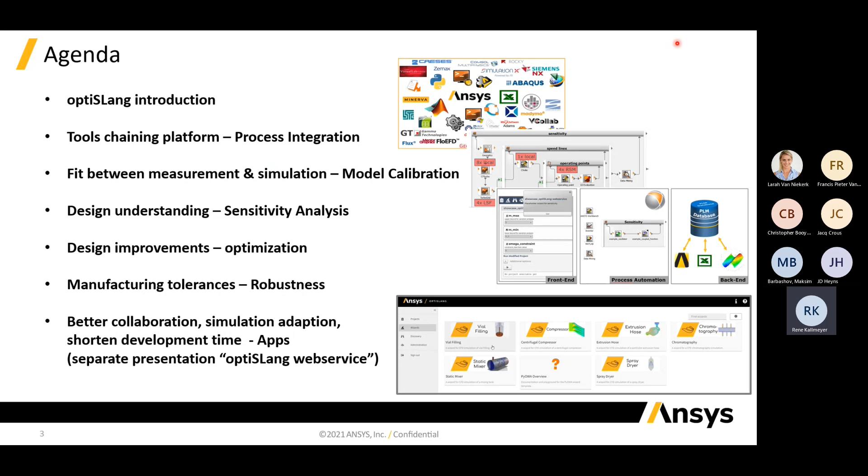Okay, so it's not a specific topic, so I can go on in this way. The first chapter will now be OptiSLang introduction, where we want to show - maybe you know on the Ansys side there's some platform unit, and in this platform unit there is Ansys OptiSLang, the tool for simulation automation and optimization, and also Ansys Granta, the material database, and also Ansys Minerva, the SPDM solution from Ansys.

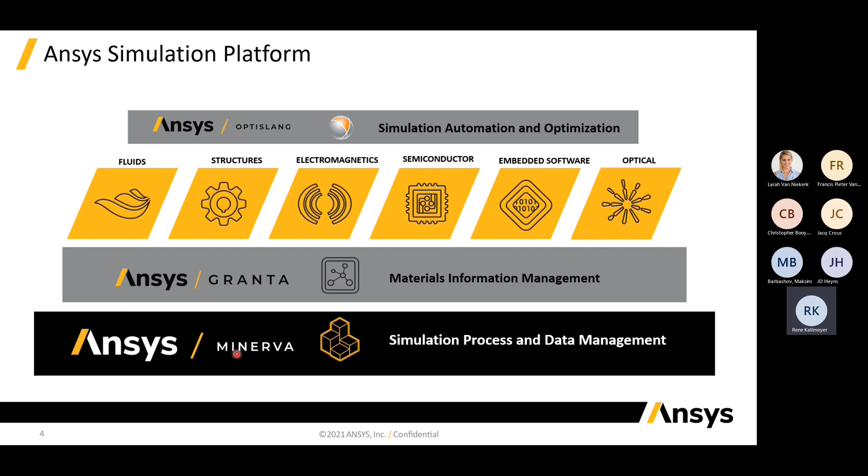And what is now OptiSLang? Here it should be shown how OptiSLang can help in this product development process. It means at each start you have some initial design or initial idea where you want to start, and you have some given design space, and you have some goals you want to minimize and also requirements which you must fulfill.

With OptiSLang, we want to show the optimization potential across the whole design space. We want to identify the ranking of important input parameters. We want to check robustness and reliability, and then be able to simply publish and reuse these created simulations and results.

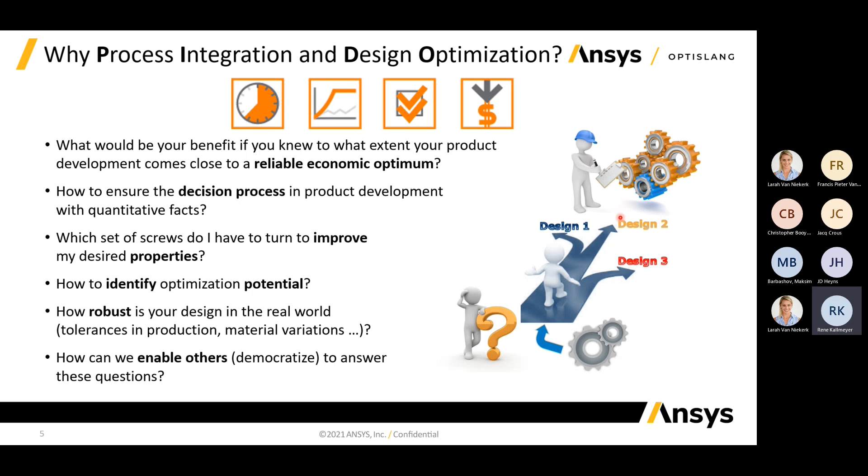And therefore, here you can see our capabilities we can offer for you. That means OptiSLang is a so-called PIDO tool, for process integration and design optimization. On the left-hand side, you can see which capabilities we offer for process integration.

The first one is we are vendor neutral. That means we are a platform where we can connect to Ansys tools, but also non-Ansys tools, or your own written tools. So we can create any tool chain you want and then let it run automatically overnight, over the weekend, over weeks, whatever.

And then also enable your colleagues, maybe your concept engineers or CAD designers, to reuse your previously created simulations. We want to drive this topic of simulation democratization. We want to enable, with our apps, that non-simulation experts can also use these created workflows. And going hand in hand with this, by using some of these analyses, we want to create digital twins from simulations, but also from external data like measurements or production data.

On the design optimization part, we start with sensitivity analysis. This means we want to see and check the ranking of most important, less important, and nearly unimportant parameters. We want to see what optimization potential we have, and gain system understanding of your assembly. Then we continue with optimization strategies, maybe Pareto optimization, cost function plus function optimization, or cost optimization and function optimization.

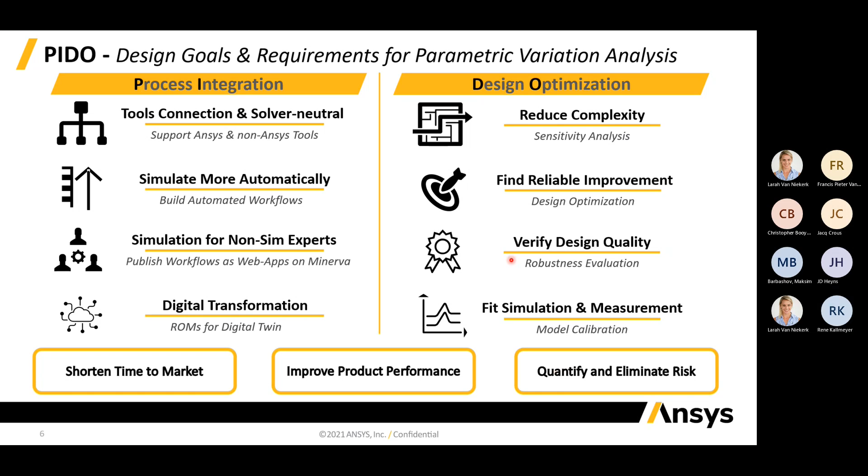Here, maybe in a more graphical way, I want to show you this topic of process integration. That means we want to create a tool chain, and therefore we can connect to any solver, non-Ansys tools, Ansys tools, and your own written tools, and create a tool chain out of it.

Here we are, not all solvers we can connect are listed. So if you have a question regarding a specific solver, maybe one which is not listed here, please ask, and then we can discuss if we can connect it.

And maybe also here now some question from my side. Do you have a specific solver where some connection to OptiSLang is needed, or do you want to find it here on this table?

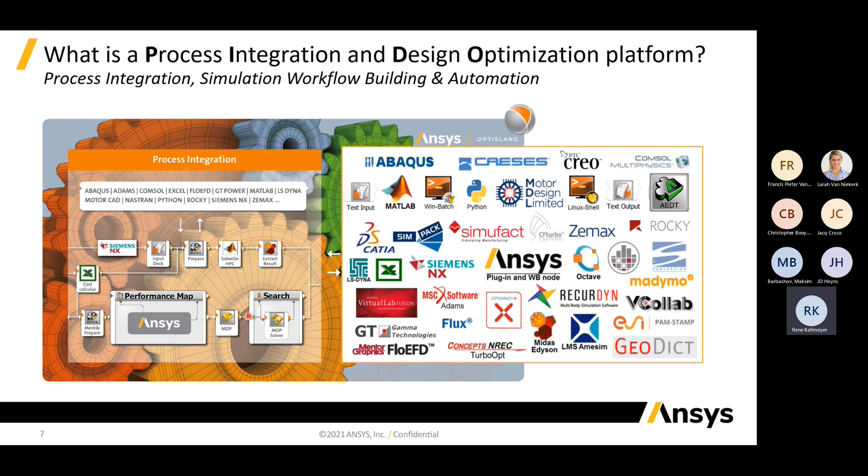And once we have created this tool chain, then we want to go on with design optimization. Design optimization means for us robust design optimization strategy. It means starting at the beginning with some calibration.

Calibration of a material or of a system, and then using this calibrated material for some variation analysis where we want to increase design understanding. We want to create meta models, which you'll see more of later, and this meta model will describe the behavior between input and output.

And then we continue with optimization. But in the best way, we want to optimize on this meta model so we can dramatically reduce the simulation effort. And then after finding the optimal design, we want to check if it's robust or not. So we end up with a really optimized, robust design.

So far, any questions from your side? Where and in which way can OptiSLang be used? Are you familiar with these kinds of design understanding and optimization, maybe from other tools, or are you doing some optimization manually, or some variation study?

No, I cannot speak for the others. I did use some software many years ago, so I'm trying to see what OptiSLang can do and how we can apply it on my side. For the moment, I'm just sitting and seeing what you're showing me, and then I can make a call from there.

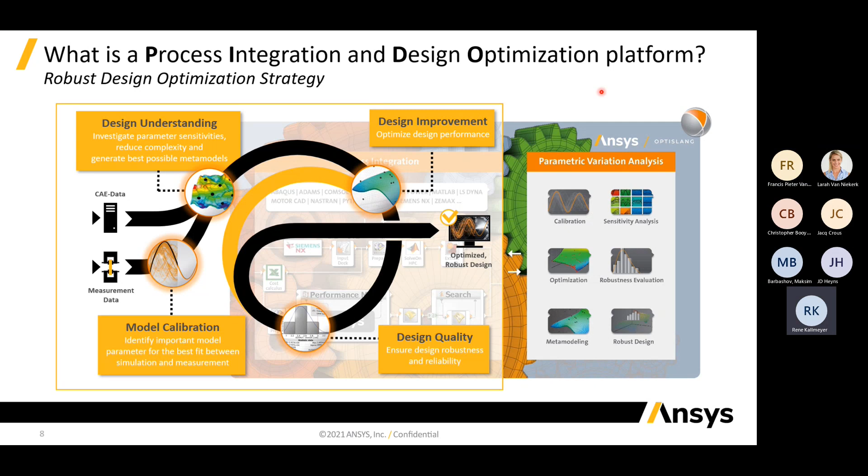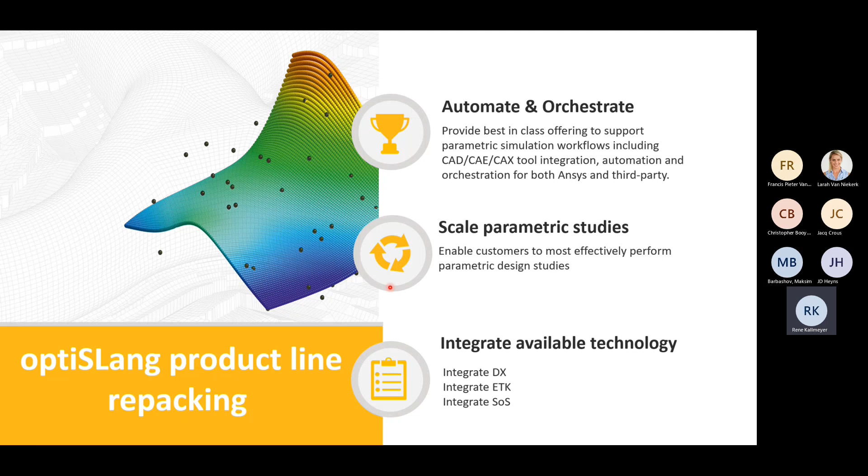Okay, so what is new in OptiSLang 21R2, the newest release. You have heard we were acquired in 2019, and at Dynardo we not only developed OptiSLang, we also developed other tools like SOS, Statistics on Structures. Things like Design Explorer are now integrated into OptiSLang, and therefore some repackaging was necessary.

If you want to work with signals, for example doing calibration, you normally want to calibrate signals. Or you're working with field data, meaning a distribution of temperature on a surface or a pressure distribution - this is also possible with OptiSLang Enterprise. Or if you want to implement AI techniques, this is also possible with OptiSLang Enterprise.

This is also new for Premium and Enterprise: we now have the possibility to run up to 8 designs in parallel. This means there is now an HPC licensing technique implemented in OptiSLang. With OptiSLang Premium we can run 4 designs in parallel, or 8 designs in parallel with Enterprise.

This means it's not needed to get or use more standalone servers for CFD, Workbench, or Ansys. OptiSLang creates an umbrella and brings these HPC licenses with it. It's also not needed to use other HPC licenses you may have in your company.

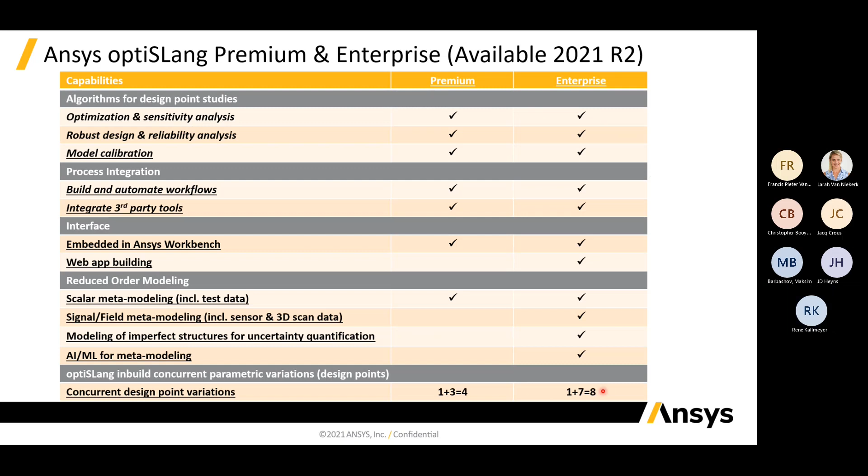Okay, and now some process integration - we want to create some connection. If you're familiar with OptiSLang and familiar with Workbench, you can create a static structural or transient thermal analysis and have a parameter set. Then you can easily connect all these OptiSLang modules and let it run.

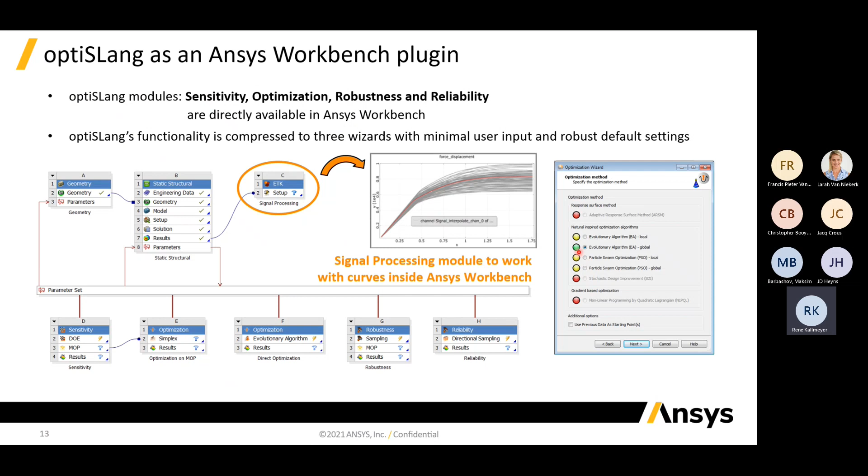Here it's really important that all these modules have a guide, a wizard, and this wizard will guide you through all the settings. At the end of each wizard we have a decision tree, and please follow our recommendation because it shows you which optimizer or which DOE method is the best one. I want to show you this directly, live.

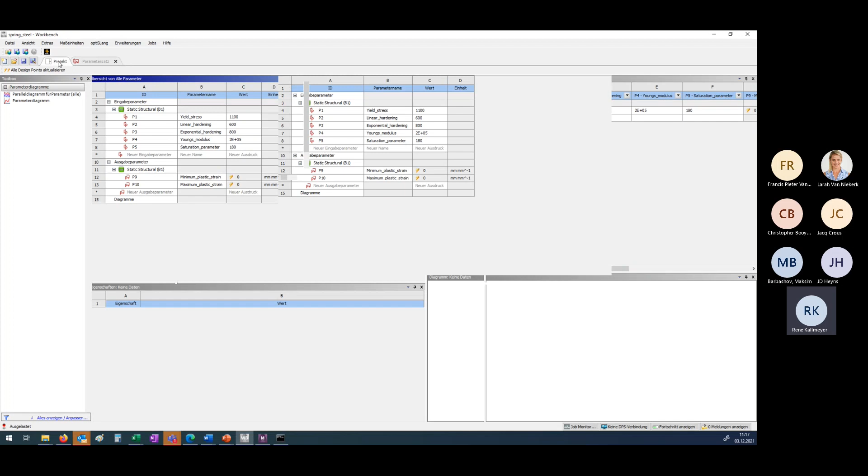Here you can see this is Workbench, I think you're familiar with it. This is a tensile test - some fixation, some displacement, very simple. Here we have all the parameters: 5 input parameters I want to vary and some responses I want to extract. Here you can see the OptiSLang modules on the left-hand side.

Now double click, and now we're connected. You can see here you can vary all 5 input parameters, maybe from 1000 to 2000, or it should be some discrete parameter. Then we can also define a discrete parameter, maybe 8, or it should be a dependent parameter - meaning this is always yield stress, whatever, plus 3. You can see if I change this one, then this one also changes.

So here you have the flexibility to define all the lower and upper boundaries you want. Then you can go to the next button - here input parameters, here the responses. Now you can define: do I want to minimize, maximize something, or define a constraint. Then going to the next button.

And here now you can see the decision tree - which DOE method is recommended from our side. Please follow our recommendation and then press the finish button.

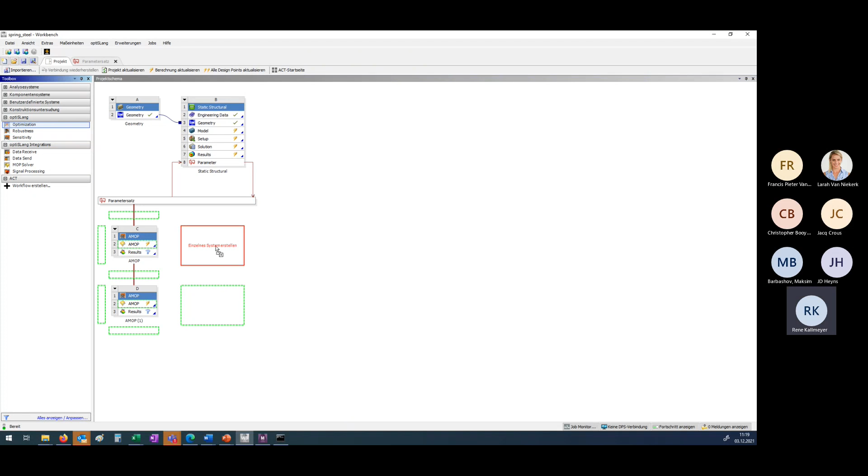And if you want to make some optimization, yes, maybe we put in an optimization. You can see the same questions - define the range of your parameters, now define maybe also the maximize/minimize objective, and now you have the decision tree from the optimizer.

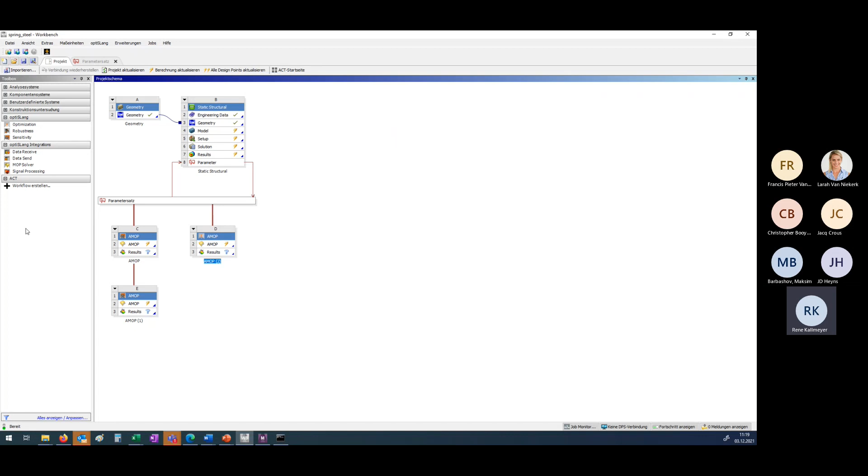So you can see it's really simple to create a sensitivity or optimization analysis by using these modules and having these guided wizards, and then you can let it run - very simple. So this was the example connecting to Workbench.

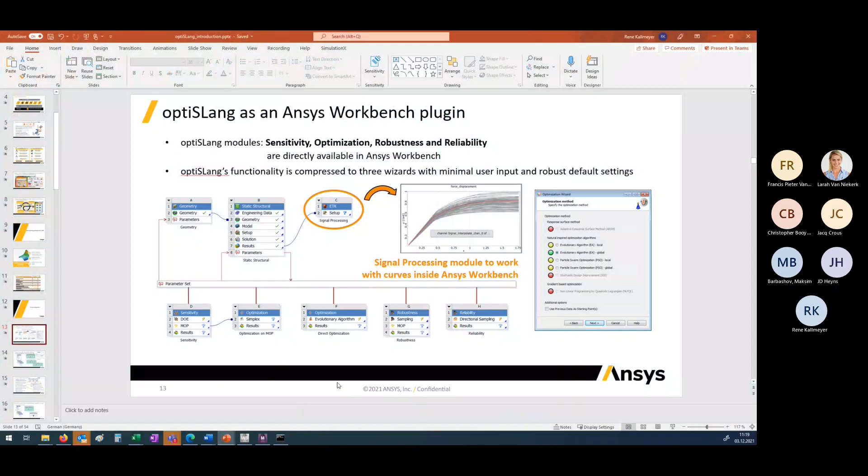And if you're not using Workbench, CFD is also possible - you can use CFD in Workbench, but mostly our customers use CFD standalone. That means we have a Fluent connection or CFX connection available. You must only define which inputs are founded, then define which inputs really vary during the analysis, and which of the responses you really want to extract.

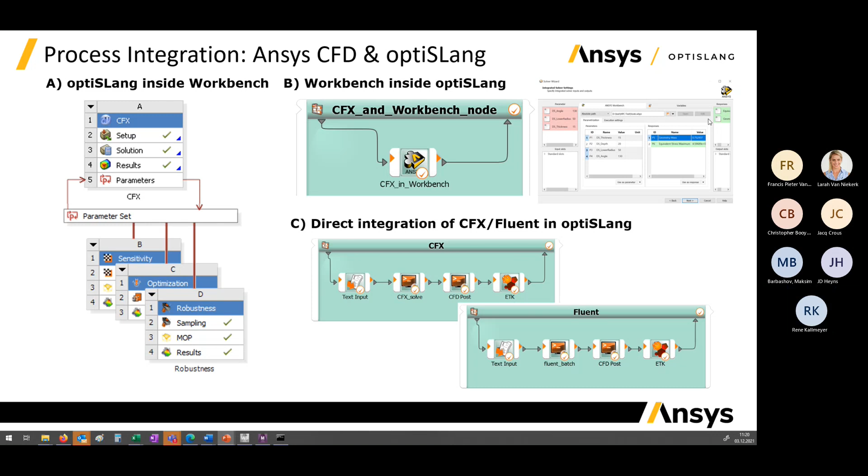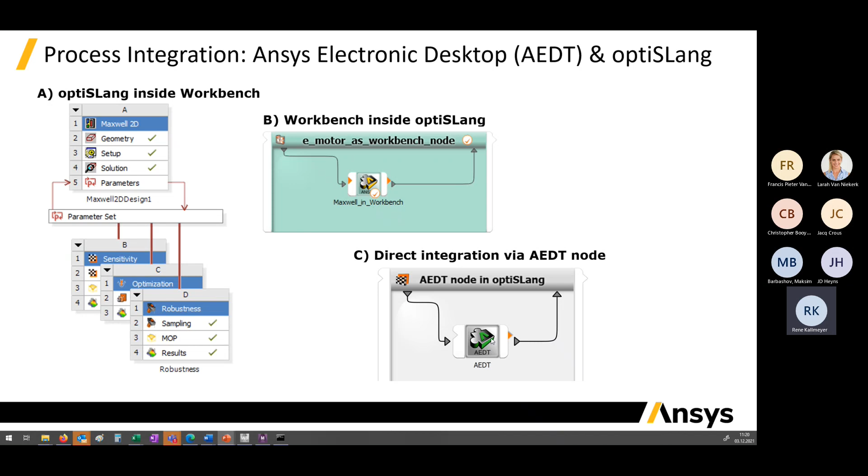Or maybe some non-Ansys solver like Abaqus, also some Abaqus connection is there by understanding really important binary formats from Abaqus. Or if you are using AEDT, maybe Maxwell, HFSS, Q3D, then you can use it in Workbench or directly use our AEDT node, especially for Ansys Electronics Desktop. Or if you are using COMSOL, numerical, other things, normally we have all the connections there. And here you're completely free to connect to any solver at your company.

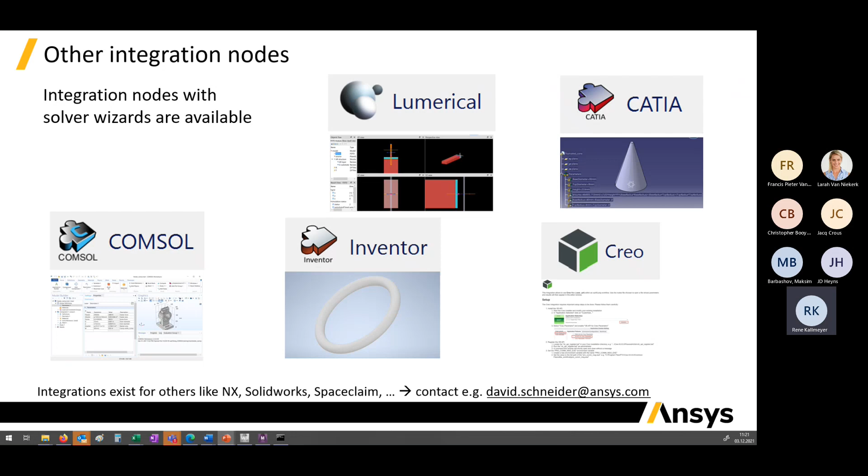Some questions so far from the process integration point of view?

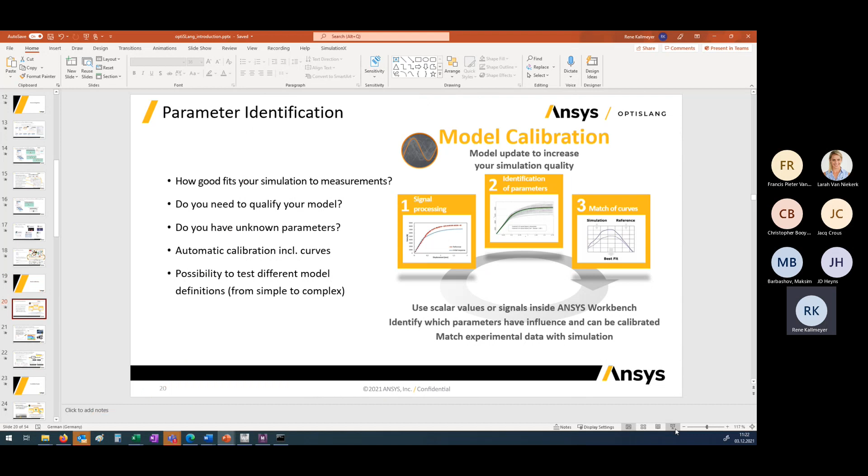Okay, seems not so. Then model calibration. Here I want to show only this one slide because I said it before: model calibration will also be a separate webinar, and in that webinar we will focus more on model calibration.

But I want to shortly explain what model calibration means for us. Here we want to calibrate a system, a material, a process. It means you have on one hand some measurement, some reference curves, or maybe only values, and you want to make a best fit to this curve or to these values. Here you can see it's only one reference curve, the measurement curve, and one simulation curve. But it's also possible to calibrate more than one signal, maybe also 16 signals some customers have done. And then you want to make a best fit.

But with OptiSLang, we can do much more than only making a best fit. Here we want to increase design understanding, because on a signal you have signal length and signal ordinate. With OptiSLang, we can show which input parameter has some influence at which signal length. If you think about tensile tests, at the beginning of this force-displacement or stress-strain curve, only the Young's modulus has some influence. Then by increasing the signal length, the yield stress becomes more and more important, elastic-plastic change, and at the end, some damage parameter will have some influence.

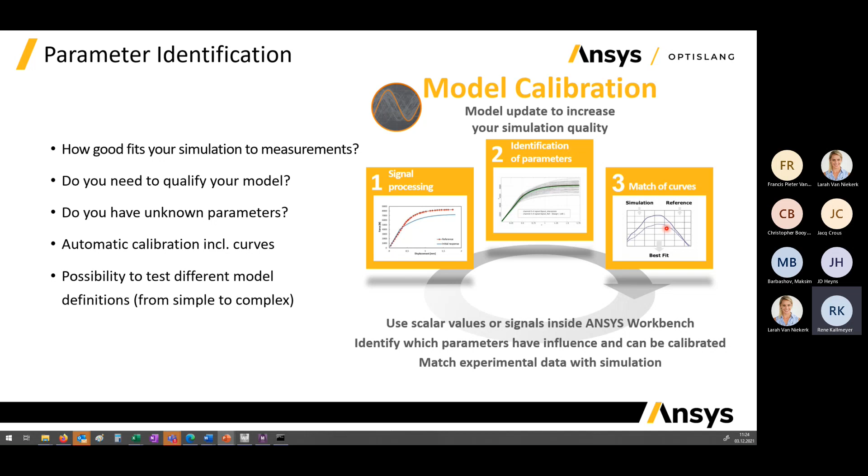And directly this we can show with OptiSLang - that means show at which signal length, which input has some influence. This is really important, not for optimization, but really important to increase design understanding. And then you can make a best fit. You can also include, if you have some scattering of measurement curves, this is also possible to include. These examples here from IFA or from Infineon and other examples, we want to show later on in this webinar.

Therefore now, if there's no question from your side for model calibration, we want to continue with sensitivity analysis.

Sensitivity analysis means, as I did before, you must define the input parameter. With OptiSLang, we have no limitation - our philosophy is going all in. Not only 220 or 200, maybe also 2000 input parameters, not a problem. And then you must define for your parameter lower upper bounds. And then you must define in OptiSLang only how many designs you want to run - that means how much time you want to spend. Maybe 45, maybe 86, or maybe 100.

And then we decide where we want to place these design points. That means we are doing the DOE for you, not some worst case scenario, not some full factorial - no, we are deciding where to place the design points. You only have to define the lower upper bounds and the number of samples you want to spend. And then every design point will be sent to the simulation, and we're extracting the responses. And then we're doing this design understanding process.

It means we are creating some meta model. Maybe you know in Excel there's some regression model, polynomial regression, which will describe the behavior between input and output. But it's really only a simple regression model. With LS-DYNA, also with mechanical, with CFD, you will mostly have some more nonlinear behavior between input and output, and therefore Excel is nonsense. Here we have many regression models to create this understanding about output and input. We can give you the ranking of most important input for the response, less important input for the response, and also information about nearly unimportant parameters - all the unimportant parameters will be directly deleted.

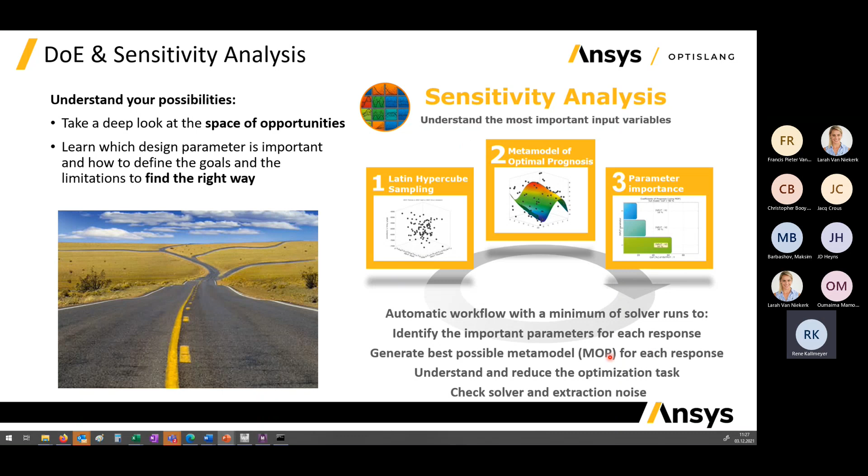Here's some slide how we create this DOE. And I said it before, we do not want to use a full factorial. Therefore, we have this so-called adaptive meta model approach. Maybe you know adaptive meshing from CFD, meshing where needed, if needed. This is the same approach here.

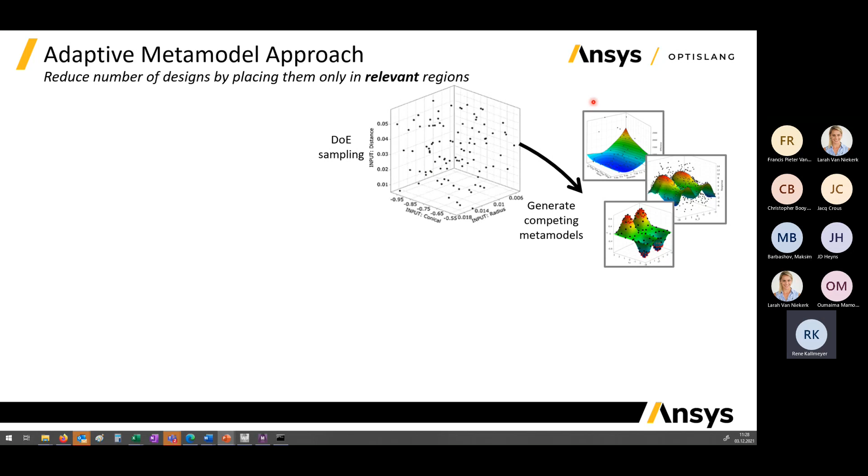We are starting with the first iteration and placing the design points. Then we are extracting the responses, and then we are creating our regression model. And really important, these regression models go into competition - some with neural network, or some like Excel, or maybe moving least squares or Kriging. These regression models go into competition automatically, and then you will end up with some specific regression model.

But then you will identify, here's some design point - is this some singularity, some solver noise, some outlier, or some physical effect which I never expected? And then we are adapting only design points if needed and where needed to identify if it's an outlier or not. So we are only adding design points in the region of interest instead of adding it in the whole design space. And so we can reduce dramatically the simulation effort, and then get again a competition between all the regression models.

And at the end, the best regression model will win. To have some objective measurement value, we are using our so-called COP, coefficient of prognosis, to decide which regression model will win - maybe sometimes AI, maybe sometimes moving least squares, or so on.

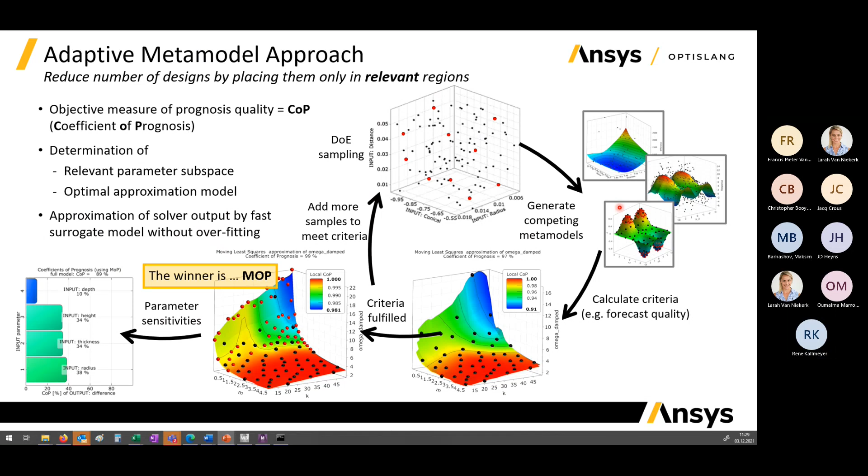Therefore, before we make a first break, here you can see we are creating these regression models. In OptiSLang, it's called MOP, Meta Model of Optimal Prognosis.

But it's also clear we can expand these techniques. If you have signals, we can identify which input has some influence at which signal length, and then we call it signal MOP. Or we can expand it to field data, maybe 2D, like a picture. A picture is nothing more like a 2D field, or some temperature distribution on the surface, also only 2D. And then we can identify where on the location some input has some influence.

And so this drives also directly this topic, predictive maintenance. We call it field MOP, and we can also expand it to 3D field.

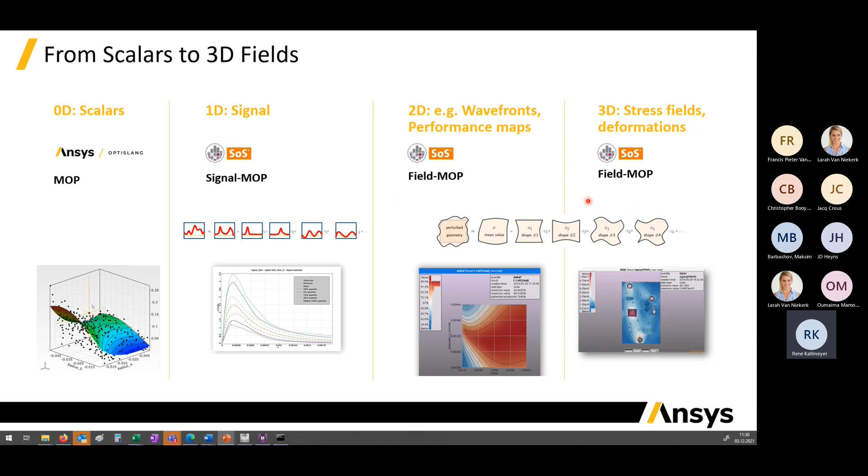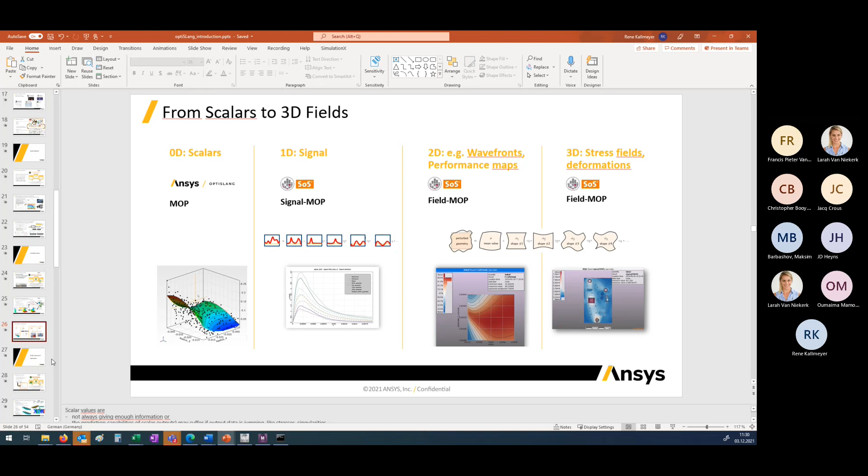Some question regarding this sensitivity analysis and increasing this design understanding? No. Okay, and therefore, if there's no question, we want to go on with the design improvement.

This means to show you some success stories of how our customers improved their system. Design improvement is nothing more than optimization. That means we have done before a sensitivity analysis where we find some pre-optimized design, and then we want to go on in the best way with some optimization on our created MOP.

Why? Because by using this optimization on the MOP, we can reduce dramatically the simulation effort, because this is like a really advanced equation, and this can be done really in seconds. In seconds we can optimize, and if optimization on the MOP is not possible due to the quality, then we have also many other direct optimization algorithms which we can use.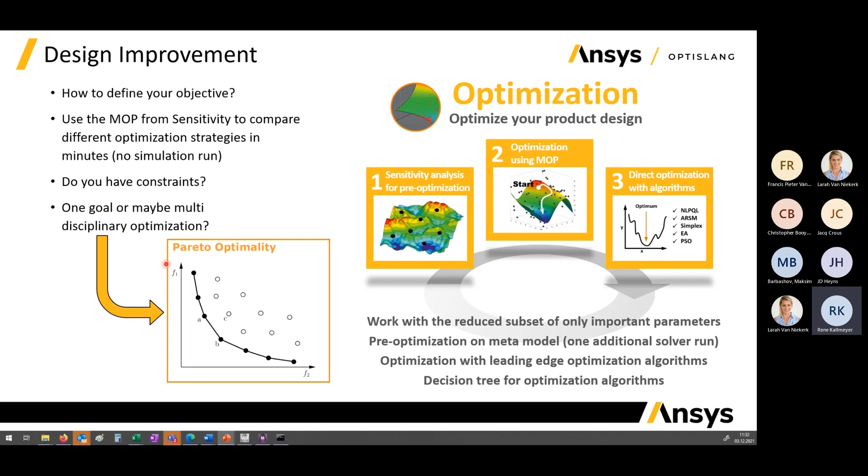And also here you can see, it will be nice if we're not only focusing on some function optimization, but if we can also implement some cost, and then mostly some Pareto optimization. That means more than one objective will be the solution, to really minimize the cost and also maximize the function. And here's some example for it, from a mechanical analysis from Fraunhofer in Germany.

So really well-educated engineers, and they optimize this structure here. That means the initial design has some initial mass and some initial deformation. In 3 positions - 90, 0, and 180 degrees - we want to minimize the mass and want to maximize the stiffness. And so we get this project, and they want to test us: can we optimize this pre-optimized design? And so we are starting with OptiSLang, and here you can see on the ordinate value all 4 responses - the total mass, and the displacement, meaning also stiffness.

On the abscissa we can see which input is most important for the displacement, which inputs are maybe less important, and which are completely unimportant. We can also see that for the mass, some other inputs are most important or less important compared to the displacements. So this is design understanding: identifying the ranking of most important, less important, nearly unimportant, and unimportant parameters.

This last column shows us the overall quality, meaning the prognosis quality of this response. We want to have normally a value higher than 80%, and you can see it's really high quality.

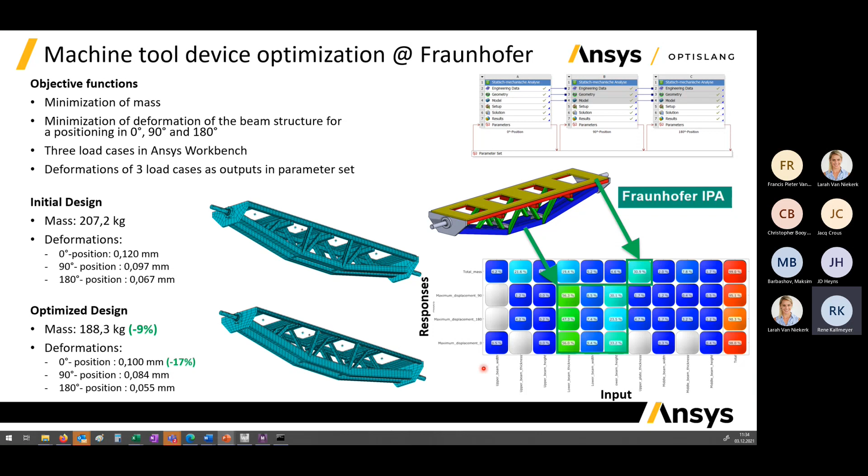Here's a nice example from Trumpf where they combine cost calculation or cost optimization with structural optimization. They have such an assembly and want to reduce the cost while keeping the stiffness. These dotted lines indicate sheets, and you can see the optimal design has fewer of these sheets, so we can reduce costs dramatically by 27% while having the same really good stiffness.

We are running 10,000 designs for this optimization to find the optimal design, but these 10,000 designs only needed 5 minutes because we are running this optimization on our previously created MOP. And this is the point from before.

We start with a variation analysis, creating this MOP for design understanding. Then we continue with optimization on this so-called MOP, running 10,000 designs in only 5 minutes, getting a really good improvement compared to the first one. This shows it will be nice if we can use an area size, a volume size, a number of devices, since all these things are normally cost relevant, so we can start with cost calculation and cost optimization combined with function optimization.

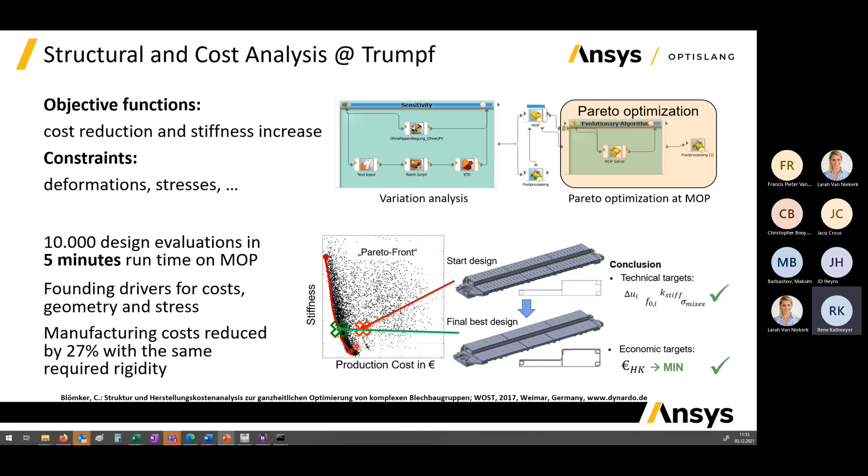Some other example here, a CFD example from Rheinmetall where they're using, I think, Fluent, having 56 design parameters. So not so easy. You can see the reference, the initial design.

After the sensitivity analysis, we can reduce from 56 to the 15 most important input parameters. Then we run a pre-optimization on our MOP, created by using a specific optimization algorithm, and continue with direct optimization using another algorithm. You can see a really good improvement of the objective function by 38%, and also reducing the pressure drop by 45%. Here's the reference design compared with the best design after the design of experiment, meaning sensitivity, then the optimal design after optimization on this MOP.

It means only maybe 100 real designs, no real design at first, and then we start again with real designs by using each time the best design from the previous analysis. You can see the improvements across the analysis types: sensitivity, optimization on the MOP, and direct optimization.

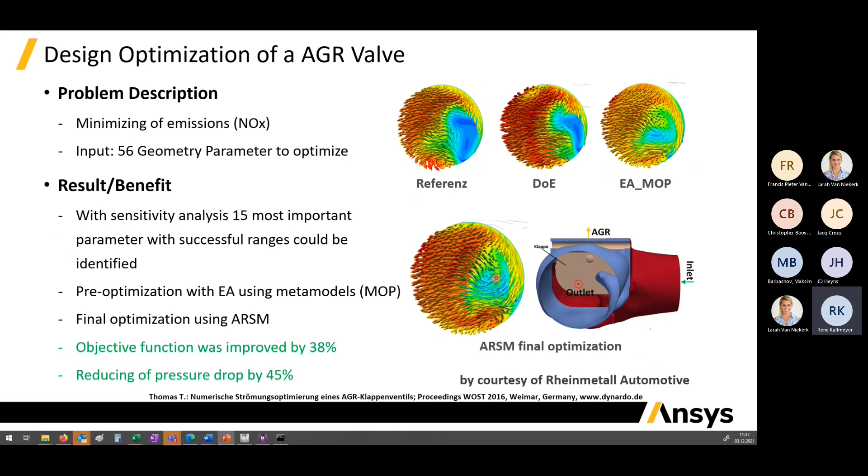Some other example, a multi-physics example of a board is shown here. We want to optimize FEM and CFD analysis, where at the end we end up with 5 constraints, objectives, and also 12 parameters.

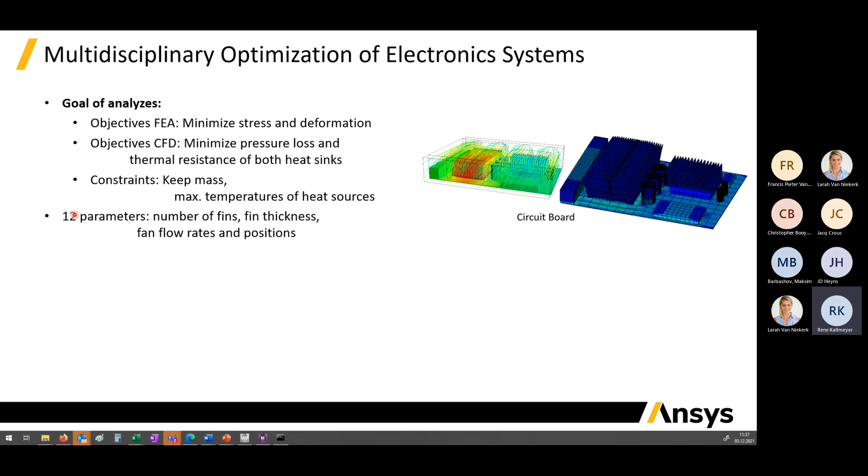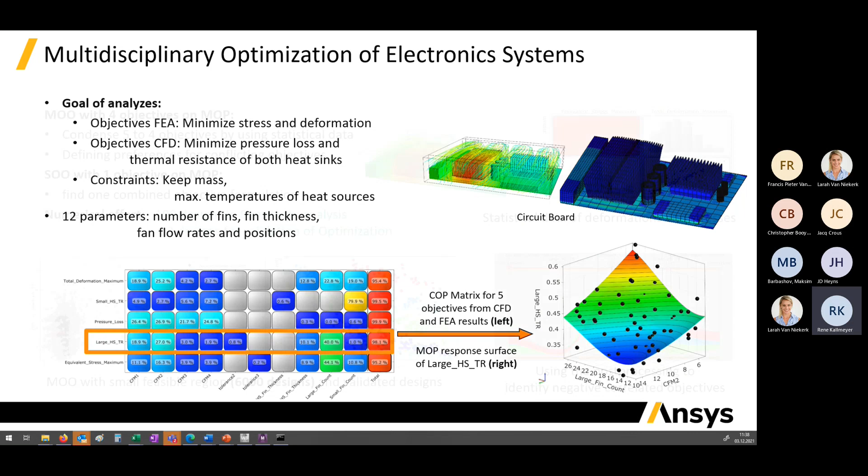Here you can see our so-called COP matrix again. We can see which inputs have the most influence on the response, less important, or unimportant parameters, and we can also see how this MOP looks. Then we continue with optimization, but you can see here too, we are starting with design understanding, investing 100 real solver calls to get this nice MOP, this design understanding.

Then we can also condense this multi-physics, multi-objective optimization to a single objective optimization, running 6,000 designs to continue with optimization, then validating only 3 designs of interest, and ending up with a really good improvement by only investing 103 real solver calls.

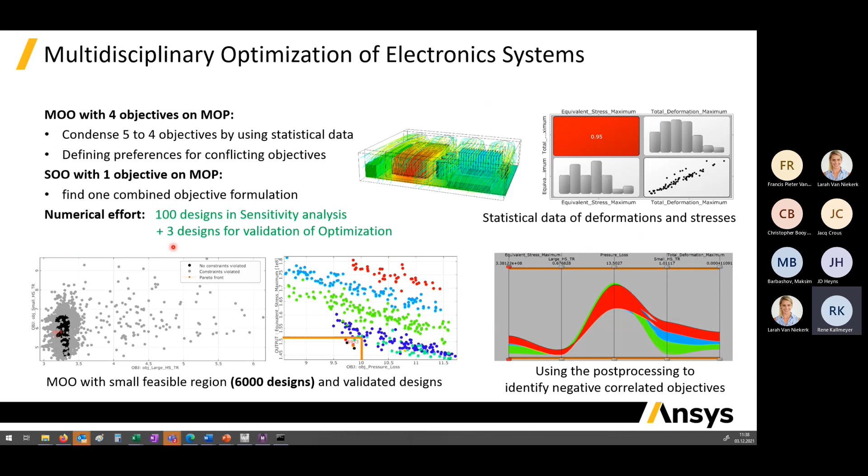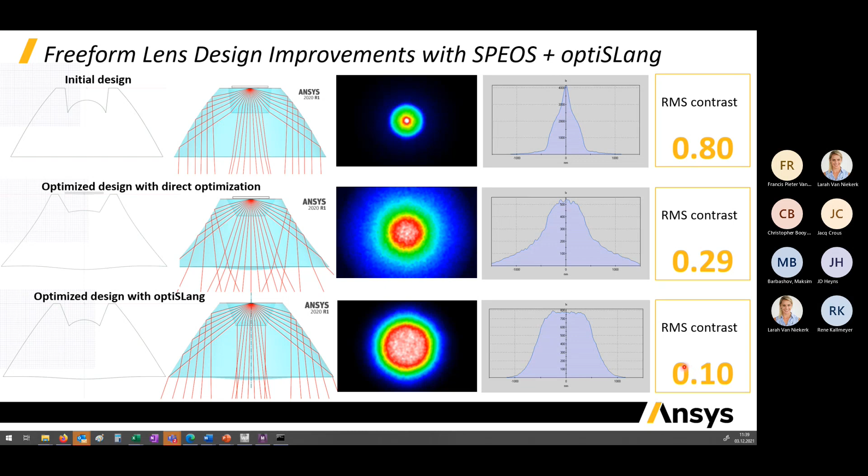Or some other example: this was the initial design, and then the best design shows a much better improvement by changing this geometry, yeah, and having some homogeneous distribution.

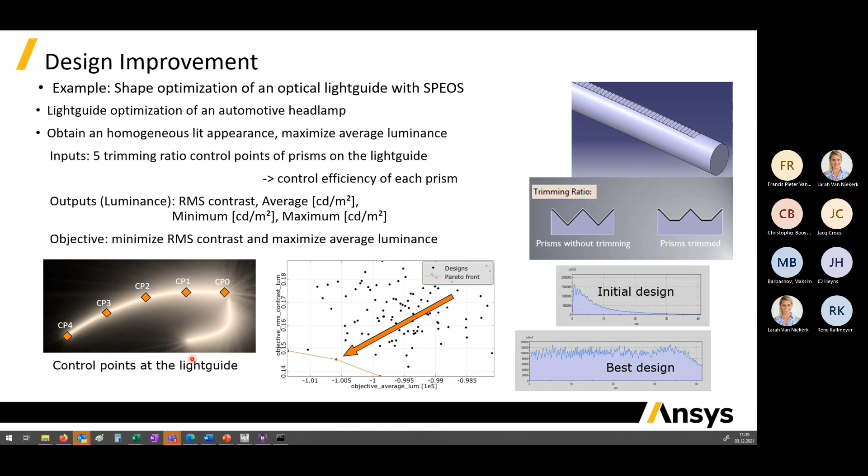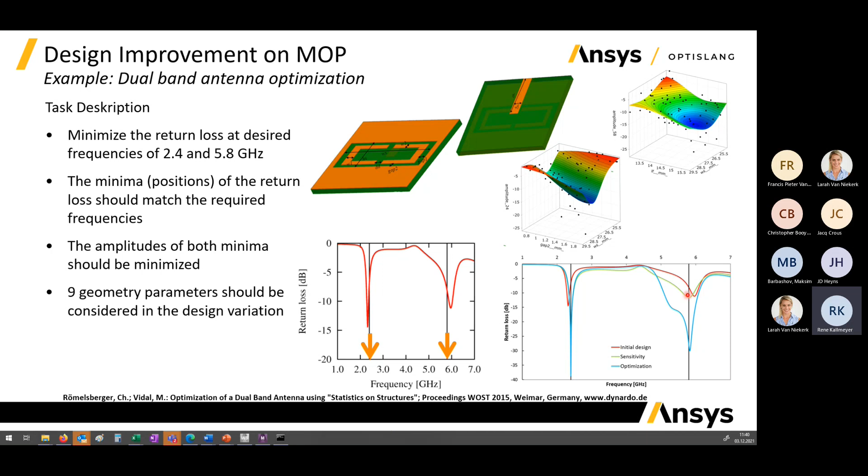Or if you are more familiar with HFSS, here we have a dual band antenna with 9 input geometry parameters, and we want to minimize the return loss on 2 frequencies. You can see here, starting with the red design and ending up with a better improved design from the sensitivity, but then continuing with optimization, we can really reduce the return loss much better compared to sensitivity alone, and also get some design understanding.

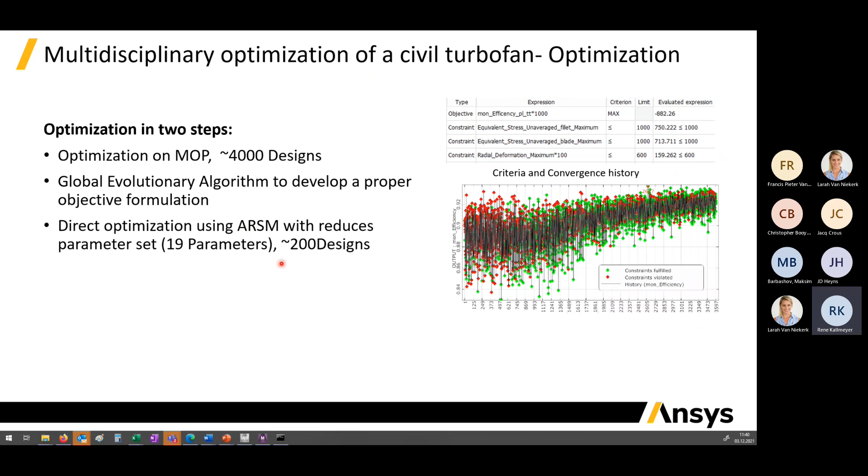Or if you are more into CFD turbofans, here you can see some optimization. We start optimization in 2 steps: first, optimization on our MOP with 4,000 designs, and then continue with a direct optimizer, investing 200 designs, with 19 parameters.

This should also show you the efficiency of our sensitivity and optimization strategy. The initial design has this value, and directly after sensitivity we have a really good improvement. If you want to invest more, optimization on the validated MOP gives further improvement. And if you invest even more, 200 designs, then also some improvement, but you can see already after the sensitivity a really good improvement is there. Why? Because we use this adaptive metamodel approach, only adding where needed, if needed. So we can come out of the sensitivity analysis with a really good design, and then you can decide if you want to invest more to get some more improvement.

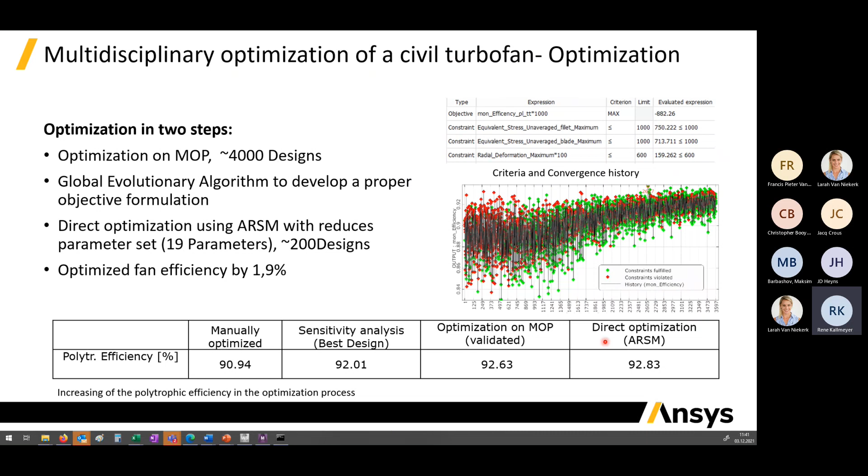Question regarding this design improvement, or do you want to see some other application you are interested in?

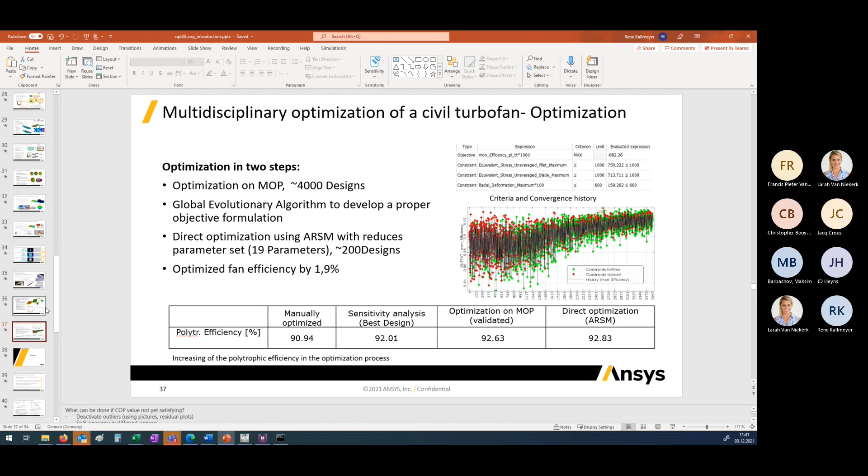Okay, so far not. Then let's continue with robustness. Robustness is also a wide topic when using OptiSLang. Normally the first question is how we can define robustness. Robustness is a really wide field.

A general definition of robustness is that a design will be robust if it's unaffected by random perturbations. But from a mathematical point of view, we need a much more accurate definition of robustness. So we have a so-called variance indicator, where we check the coefficient of variation of the inputs and compare it with the coefficient of variation of the outputs. From our perspective, this is only a tolerance check - we want to see if the input variation is smaller or bigger than the output variation.

Or you want to continue with a sigma level, meaning you define a limit and want to have a 3 sigma or 6 sigma. Or you want to go really Champions League, calculating the probability of failure. All these 3 things are possible with OptiSLang, but it's clear you need to invest more if you want to continue with sigma level or probability - though you will get more out of it.

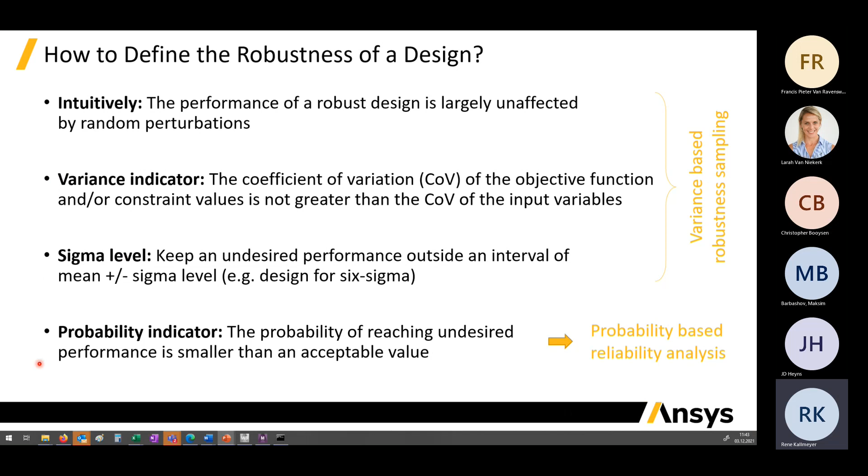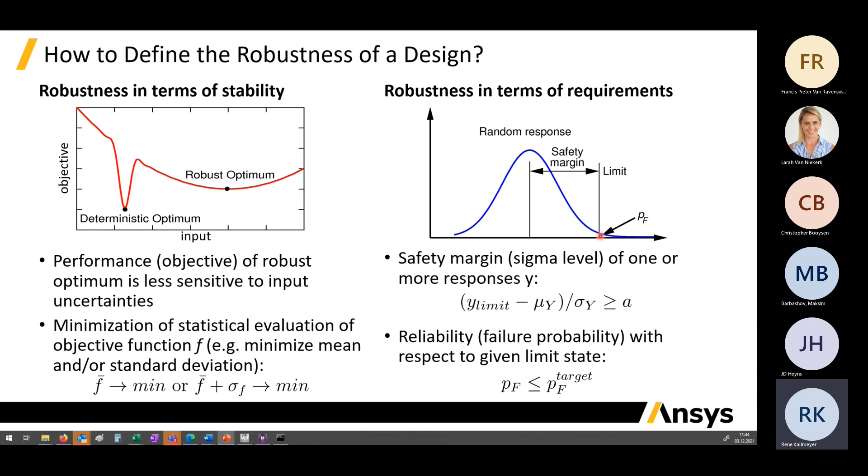Or if we want to continue with some sigma level, we must define a limit, and then we can see if it's maybe 3 sigma or 4 sigma, but it's clear we must normally invest more design points. For tolerance check, maybe 75 to 100 designs are okay, like for sensitivity, but for sigma level or especially for reliability analysis, where we want to calculate the probability of failure, we must invest more than just 100 designs.

But the process is very simple. You must define the mean value, the standard deviation, and distribution type. Then we create the design points - you only define how many. Then we extract the responses and create, like before, a ranking of most important input scattering for the response scattering, less important, unimportant, and we create a meta model.

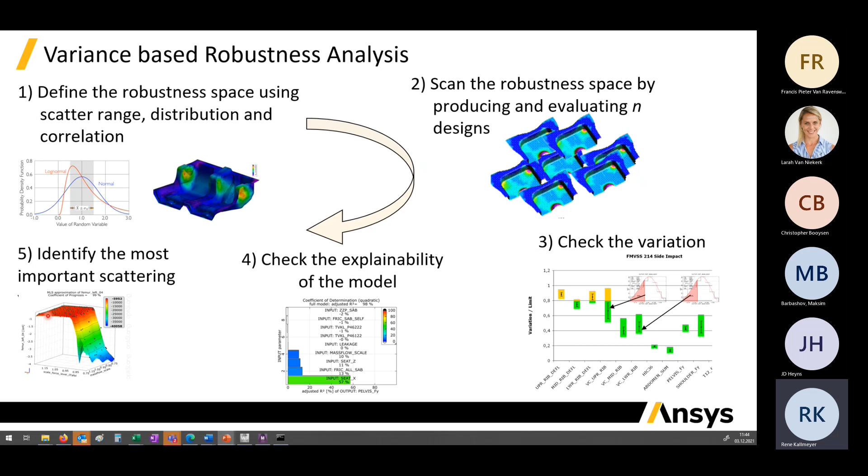I also want to mention, if you have measurement data, and normally measurement data from a real geometry also has some scattering of the geometry, we can check this input scattering for the statistical information in it. Then we can transfer this statistical information to the real geometry, and run the simulation with the real geometry scattering.

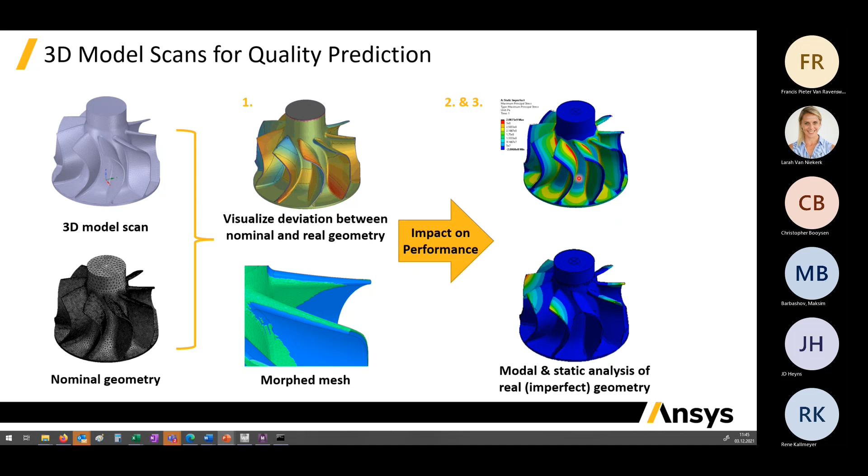This was also done for Grundfos, where we defined all the scattering, creating this geometry and coming out with some information for them. Here in this region and this region, the tolerances must be really strict to fulfill the requirements. And here in the middle, it can be very loose to fulfill the requirements.

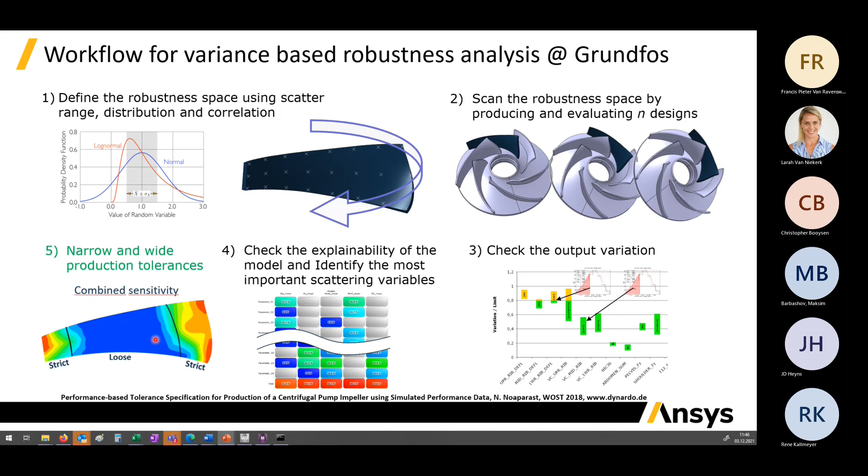Question regarding this robustness from your side?

If not, I want to go to this topic: better collaboration, simulation adaptation or easier simulation adaptation, and also shortened development time as a last topic. Therefore, I want to jump to some other presentation. Here you can see, I put it here.

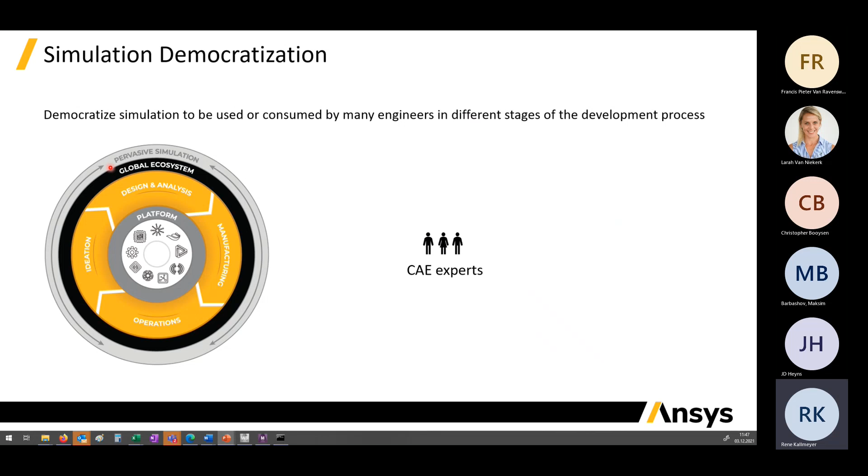What is the motivation of simulation democratization? The motivation is clear: with Ansys, you have the possibility to connect to many solvers, with OptiSLang also to non-Ansys solvers. You want to have a platform for all these tool connections, and you can run really all physics, also multi-physics simulation, but normally it's mostly used by CAE experts. And the number of CAE experts in a company is normally really small.

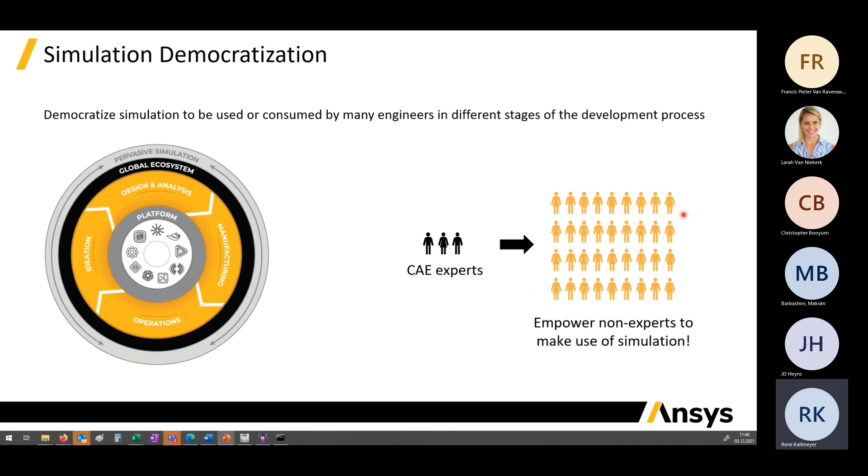But on the other hand, you have a really big group or number of colleagues who want to reuse, recycle, and benefit from the information created by the CAE expert. They want to reuse the results, they want to reuse and recycle the workflows they have created. So it's the point of one to many - concept engineers or CAD designers should benefit from the previously created information.

But it's also clear this democratization topic normally touches many points. With OptiSLang, we can touch a lower number of topics, which we'll show later on. But first, we should check which users and roles we have in the company - we have the CAE expert, daily users of simulations, then CAE users, concept engineers, CAD designers.

It's also clear this know-how should be published in some way. The CAE expert wants to automate, then collaborate, and also needs some global deployment over locations for the information, results, or simulations they created. It's clear the CAE expert has some own written tools, some ACT maybe, so he can handle it on his side alone. But how can we proceed with these other users in a company to also fulfill this global deployment?

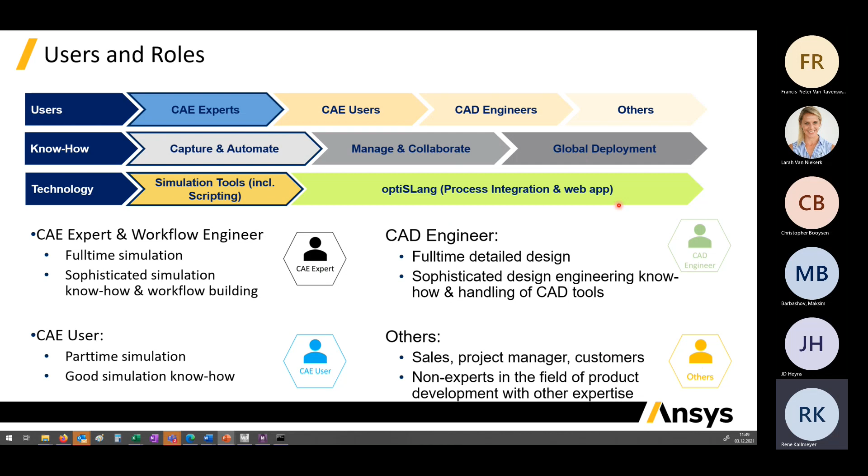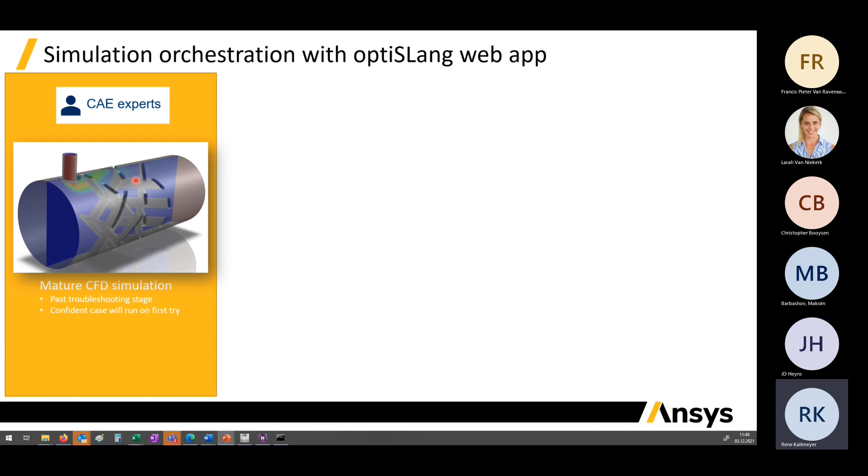OptiSLang, with this integration and these web apps, can help. In which way? This is shown here. A CAE expert has created a really complex CFD analysis, CAD defeaturing, complex meshing, complex single run, or maybe sensitivity optimization. But on the other hand, we have some user group who want a user-friendly tool without any installation, without any knowledge about optimization algorithms or CFD settings.

They only want to define what - they have their goals in mind, which they want to minimize, their constraints in mind, which they have to fulfill, and their boundaries in mind, which they can use. Maybe they know exactly how many cores they want to use today, but nothing more do they want to type in or define.

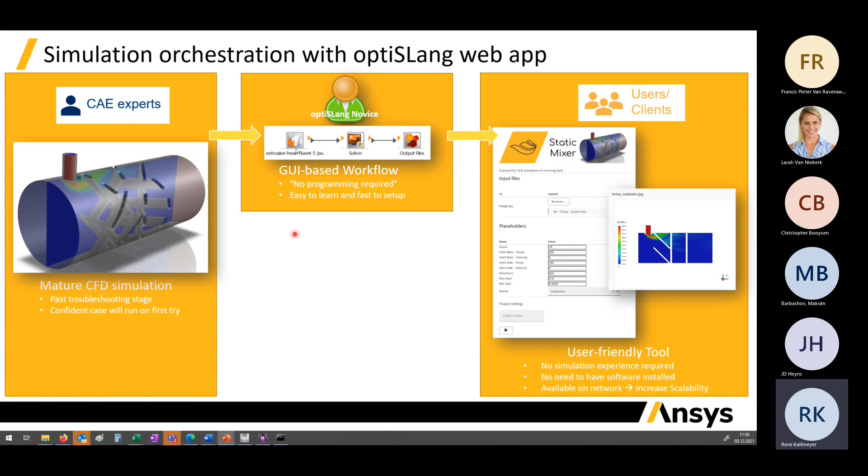And therefore, OptiSLang with these OptiSLang apps can help create such a tool without any programming. Here you can see these are some apps, some specific apps for CFD calculations, or maybe for mechanical, for ADT, which directly gives you the possibility to easily adapt a simulation and then reuse the results for some what-if study.

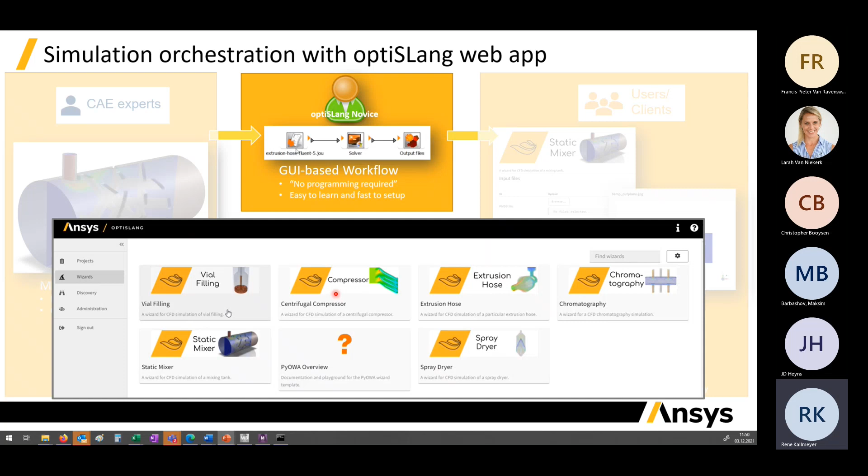We made a survey of our customer base who are using these OptiSLang apps - what is the benefit of using OptiSLang web apps? A big benefit was really a reduction of development time and development costs, the collaboration between different departments became better and better, and efficiency increased.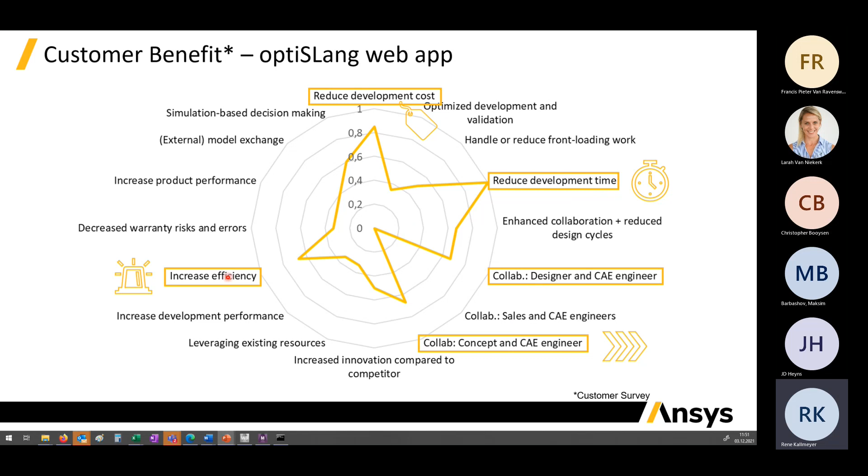We also asked them what are the key ingredients. The key ingredient is I need to have some parameterized workflow, I need to make some automation of the workflow to get a standardized and reliable workflow or workflows. And directly all these four topics are completely 100% OptiSLang.

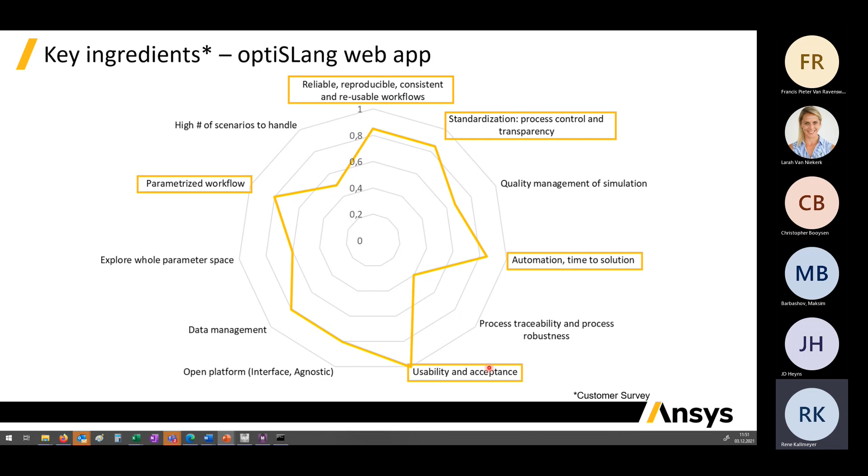But then we also get in touch with this topic of really including non-simulation experts. The acceptance can only increase if the usability is good, if the controlling, if the web-based post-processing is really nice. We've been working this past year to really increase usability, so the acceptance will become higher and higher.

Before I can show it to you directly live, here you can see which topics of simulation democratization we can touch with our OptiSLang web app. That means we can work with non-simulation experts, we can create digital twins from measurement or simulation, we can automate it, and we can also connect to SPDM.

In this way, I want to divide it into several applications. You can use these apps for some published workflow on the left-hand side, or published what-if studies. Publish workflow means you want to adapt some simulation - you want to change the boundaries or the goals and then press the play button.

But here it's clear we need a workflow which was created before. On the left-hand side and right-hand side, what-if studies means I have some ideas in mind and want to check them—not only from my perspective, but also from a concept CAD designer or management. I want to input or define some inputs and calculate all the outputs in seconds. It means a fast pre-calculation by using what-if studies.

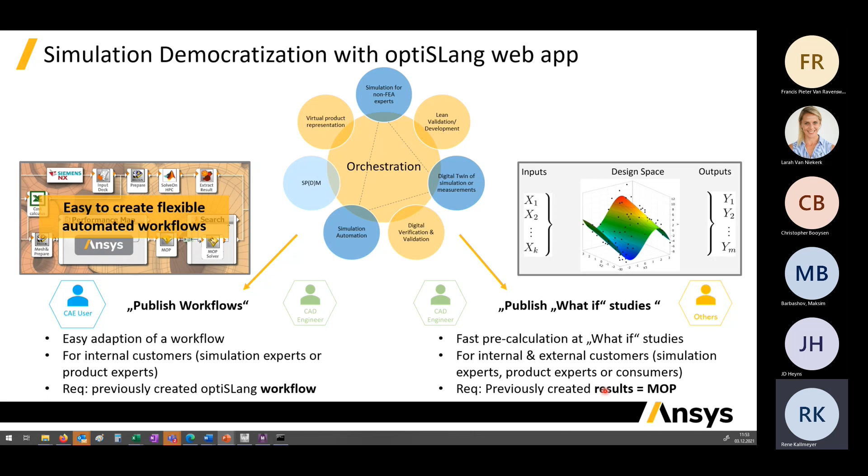This is possible, but it's clear we need to have some results before—results in OptiSLang called MOP, which must be created first. Therefore, in the last minutes, I want to go to these apps.

You can see here these are my apps, and I have a specific app for this. You can see all the explanation about what's inside, and now I can browse or change the value. I have the possibility to change the reference value, then I can shortly define some name and press the play button.

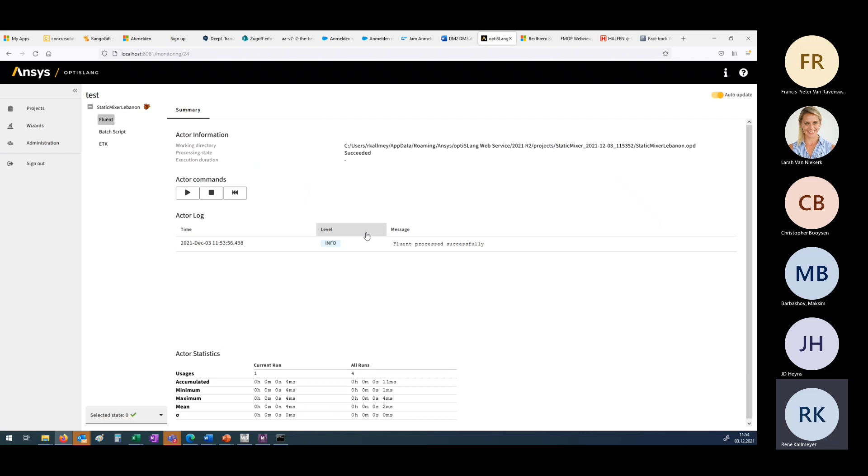And then this design will be executed. You can see it's now processing. The scenery looks like some fluent variation or fluent parameterization, then the batch core fluent, and then extraction of the responses. You can see here, yes, the parameterization was successful, and now it is running.

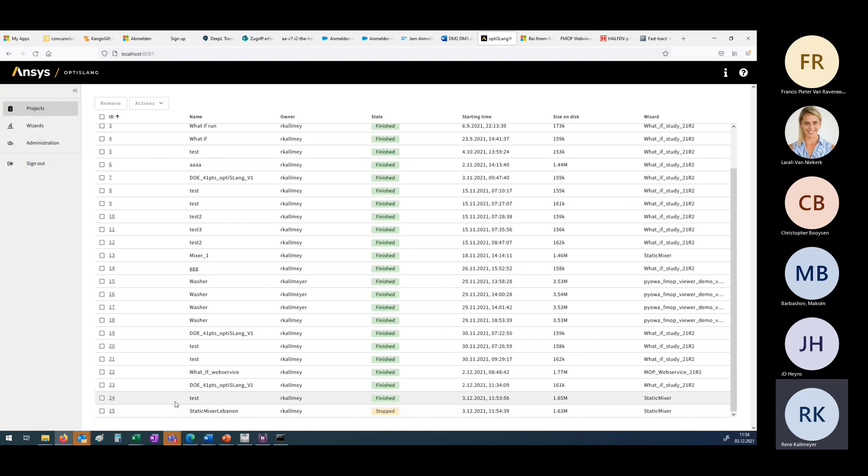I have some error, maybe I'm out of the boundaries. You can see later on if it would be successful, maybe I can create it again, or run something again. So it's stopped now, and it's ready.

Also maybe I have some license error today, so I cannot show it directly because here I only have the inputs. But in this way the wizards are working, or maybe some wizards for this what-if study.

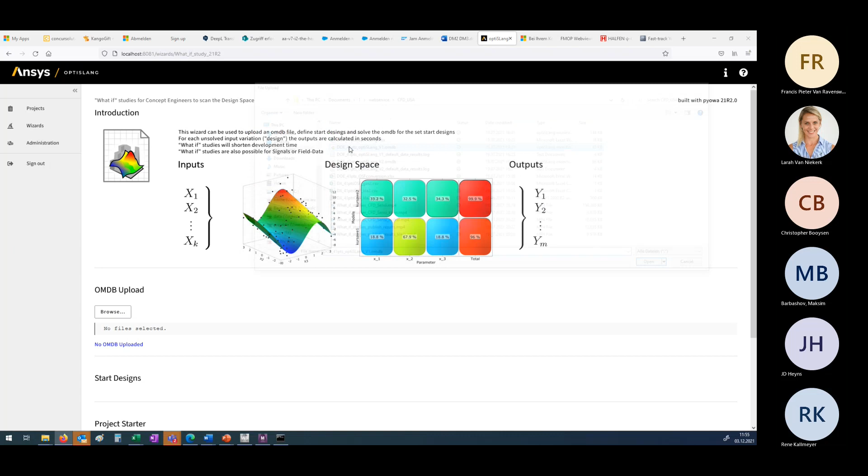Here you can see some what-if study and you can load any results you want. The results will be shown here. Two inputs are founded, and now you can define how many designs you want to check.

You can define all your input values you want to check, and then shortly define something else—maybe this one. Then we can press the play button, and all these 6 designs will now be calculated in some what-if study.

You can see it's now stopped, and now it will be processing. Here 6 designs are defined, and these 6 designs will now be calculated, but only on this MOP. Maybe I have really some license error, because normally it's now processing all 6 designs.

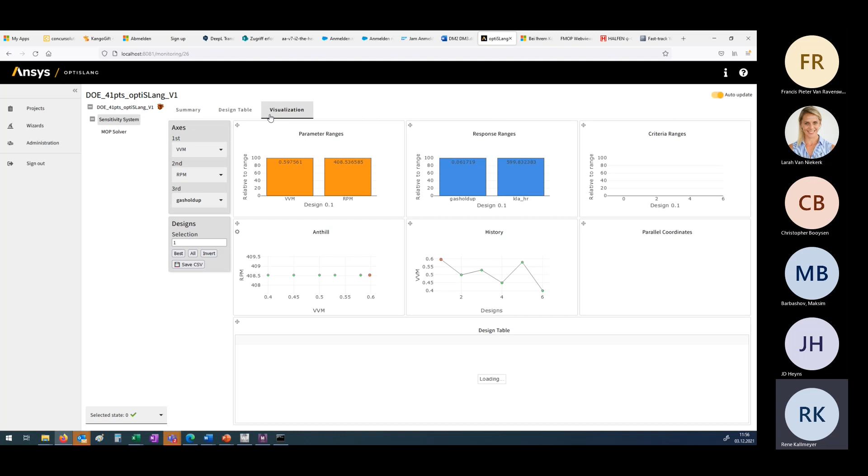6 designs are ready now. Here, successful—so now it's finished. Here you have the possibility to see all 6 designs in the web base, 2 input parameters, 2 responses, and you can see how it looks from the input side and the response side.

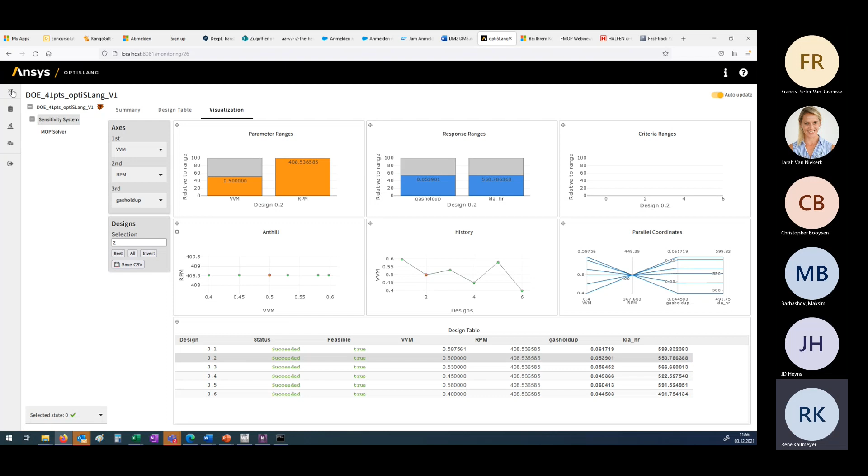This is an easy way to really make better collaboration, because this can be published or handed over to some concept engineers for making a what-if study. So you can make a really fast pre-check, or as I said before, you can run a specific analysis just by pressing the play button.

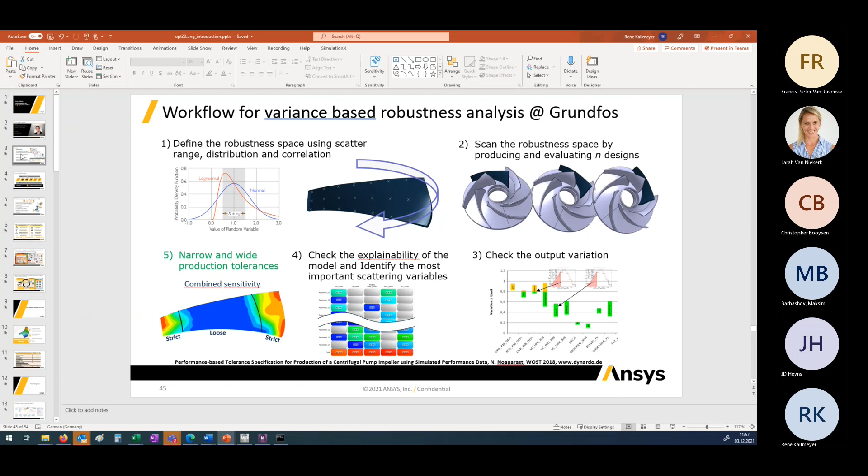Larah, Rene, thank you—no questions from my side. I will have to work through this again. Thank you so much. Thank you. You're welcome.